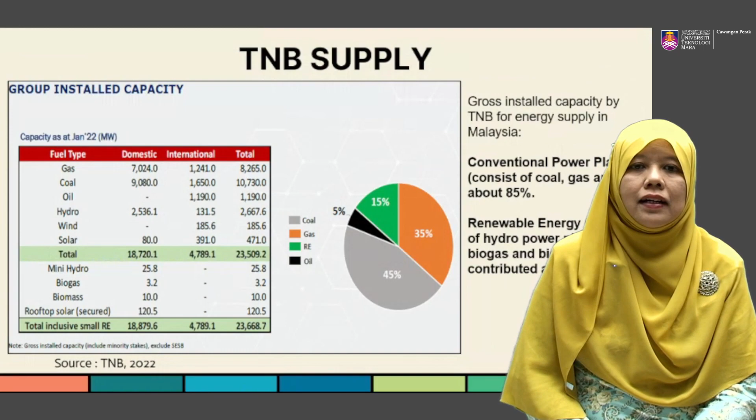There are two types of conventional plants in Malaysia. The first is the coal power plant, which has two types: non-ultra supercritical (non-USC), the normal coal power plant, and ultra supercritical coal plant, which has improved efficiency. The second type is the gas power plant.

This includes open cycle gas turbines and combined cycle gas turbines. For the gas power plant, in case of a shortage of natural gas, this plant can also run on distillate fuel oil.

Renewable energy includes hydro and solar. There are two types of hydro power plants in Malaysia: hydro power plant with capacity more than 10 megawatts, and mini hydro plant with capacity less than 10 megawatts. For solar, there are two types: ground-mounted solar farms, called large scale solar photovoltaic farms (LSS), and floating solar power, which is only a case study in Kelantan.

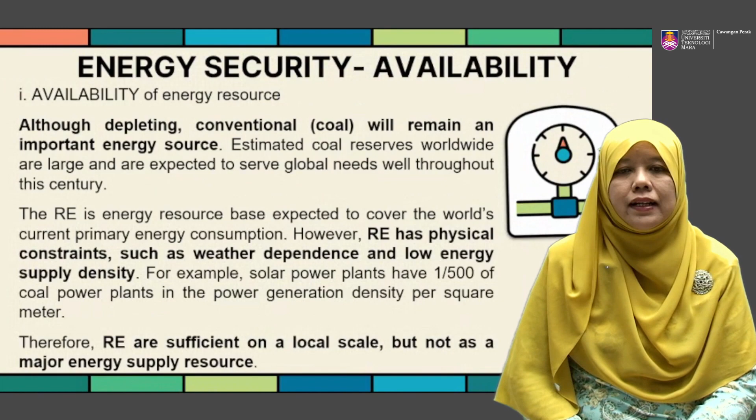The third factor of energy security is environmental acceptability. The main barrier for coal is environmental sustainability in terms of greenhouse gas production, which has generated enormous public interest. Technology development in carbon capture and storage is a potential technology to reduce carbon dioxide emissions.

The challenges for huge renewable energy projects like massive hydro and large-scale solar farms are land acquisition, environmental degradation, and deforestation. The development of a huge dam or solar farm will impact society and have other environmental repercussions.

The last issue of energy security is affordability, specifically investment cost affordability. Among energy resources, coal prices are relatively stable and require the least investment cost. However, to achieve an economic and environmental balance, coal is subject to additional costs from applying technology to reduce carbon dioxide emissions.

Cost competitiveness is a major challenge for renewable energy as it costs more than coal in infrastructure construction and energy generation costs. Technology advancement is considered an effective way to reduce the cost of renewable energy development and storage.

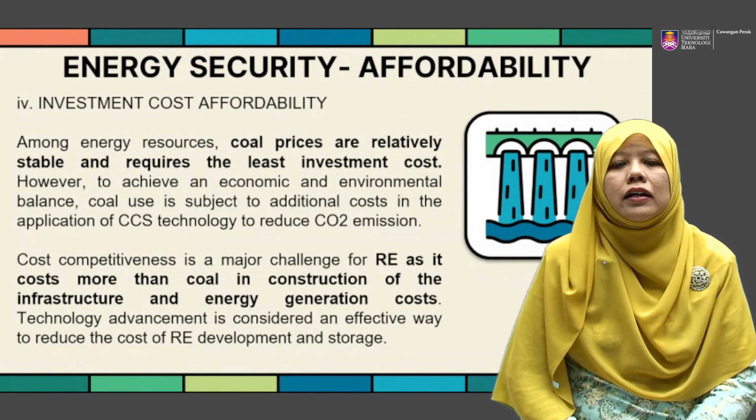These are the challenges in terms of sustainability, innovation and technology, quantity supply, demand requirement, affordability, and sources. For sustainability: environmental and social impact of power plant development, environmental aspects related to the size of the plant, the footprint, area required, the impact to the environment, and greenhouse gas reduction.

For innovation and technology, advancement is needed, such as battery energy storage systems for renewable energy, and matched energy technology such as ultra supercritical coal plants is required. For quantity supply, power generation density and the ability to generate electricity to meet energy demand is required.

For affordability: investment cost, and reasonable, affordable tariffs to customers. For resources: abundance of resources, whether limited, locally available or imported, transportation constraints, and weather dependency. So these are the challenges.

As a conclusion, diversification of fuel sources to generate electricity is essential to ensure reliability and sustainability of energy supply to the national grid in Malaysia. This seeks the balance of energy supply between conventional and renewable energy, which is a long way to achieve in sustainability of energy supply.

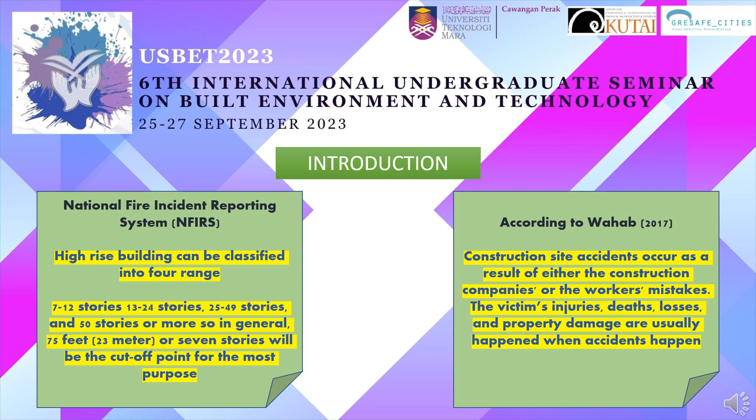According to Wahab 2017, construction site accidents occur as a result of either the construction companies' or the workers' mistakes. The victims' injuries, death, losses, and property damage usually happen when accidents occur. Due to this, construction projects may have a financial and time impact, which might lead to project cost overruns and delays.

High accident rates in construction are nothing new, but they are not something to be taken lightly. When an accident occurs, it affects not only the injured person, but also the morale of other workers. In addition, it costs money and slows down construction progress. It has been apparent in recent decades that the building industry needs to be more aware of safety, because work-related injuries, workers' compensation, insurance premiums, injury-related indirect costs, and litigation are all quite expensive.

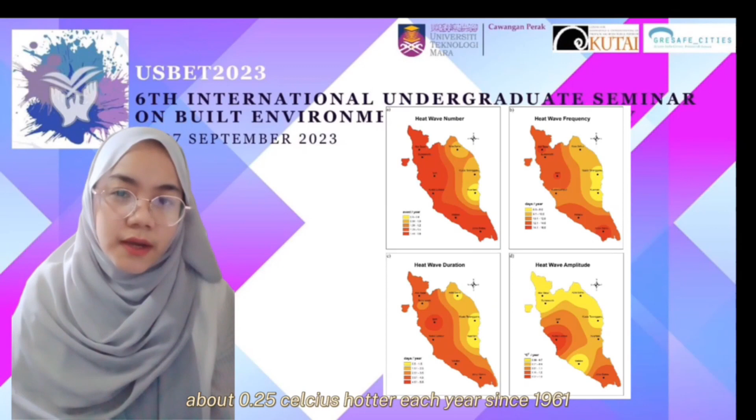Let's start with the weather check. Over the years, Malaysia has been getting warmer, about 0.25 Celsius hotter each year since 1961, and it's not just the heat. Rainfall patterns have gone a bit haywire, with extreme events like heavy rains and heat waves becoming part of our life.

So what's the big deal? Well, climate change isn't just about messing up the outdoor plants, it's causing floods, landslides, and rising sea levels. And guess what? Our buildings are not immune to all this drama.

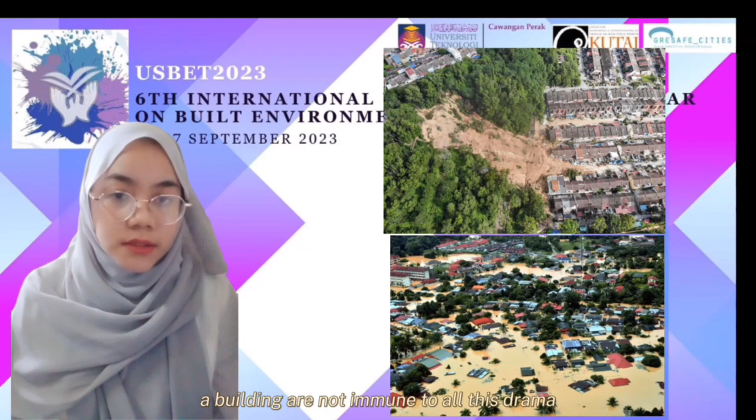Here's the scoop. Climate change brings on a bunch of new challenges for building upkeep. Think leaky roofs from heavy rain and structures taking a beating during storms. It's like our buildings are facing extreme weather tantrums.

Now let's talk about money. Keeping buildings in good shape isn't free, actually it can eat up a big chunk of the budget. Imagine maintenance costs shooting up like a thermometer on a hot day.

Time for some real-world action. Our research zoomed in on the mosques in Seri Iskandar: Masjid Bandar University and Masjid As-Siddiq. These places serve as our detective to understand how climate change impacts maintenance.

To sum it up, this research shouts out a loud and clear message: climate change and building maintenance are like buddies. What happens to the weather affects how we care for our structures. And guess what? It calls for action.

And that's a wrap. Remember that together we can shape our future, where our buildings stand strong against the challenges of climate change. Thank you all for joining me on this journey through the impact of climate change on building maintenance. Your attention and interest truly meant a lot. Thank you.

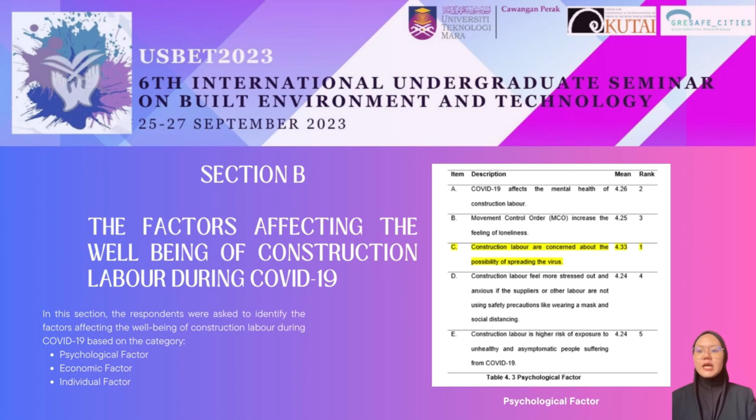The table showed the psychological factor affecting the well-being of construction labour during COVID-19. Construction labour's concern about the possibility of spreading the virus has been found as the main psychological factor for construction labour. Next, economic factor.

The most highly rated economic factor was SOP limiting the number of labourers on a construction site. Last but not least, individual factor: the most highly rated was the spread of the virus caused by the lack of social distancing between construction labour.

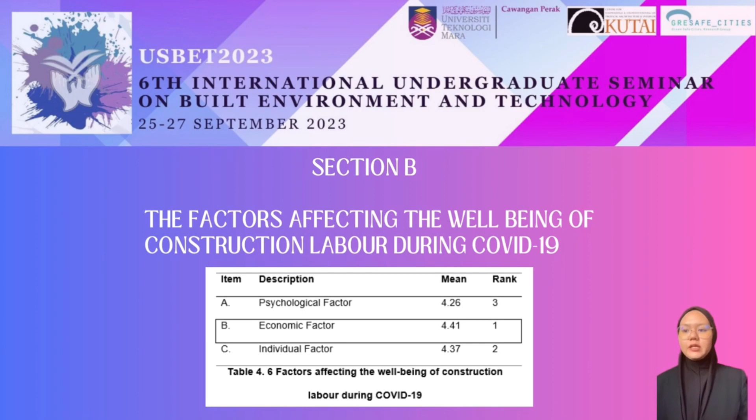Based on the analysis of factors affecting the well-being of construction labour during COVID-19, the mean score for each category was discovered. The most affected category was economic factor, followed by individual factor, then psychological factor.

In conclusion, the study showed COVID-19's impact on construction labour well-being, encouraging industry awareness and proactive measures. Understanding the pandemic's effects on health, social protection, and clear protocols and safety are important for secure work amid COVID-19. That's all from me, thank you.

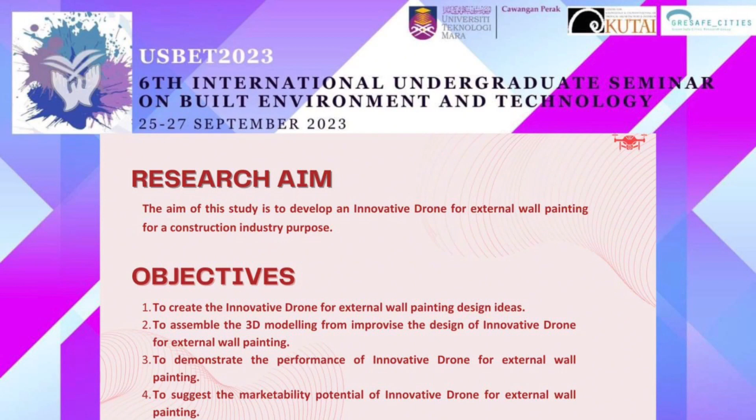There are 4 objectives that need to be achieved. The first is to create the innovative drone for external wall painting design ideas. Next, to assemble the 3D modeling from improvising the design of the innovative drone. Third, to demonstrate the performance of the innovative drone, and the last is to suggest the marketability potential of the innovative drone for external wall painting.

The literature review, collected from various databases, consists of first, dependency on workers; next, issues with chemical wall paint exposure to painters which relate to health issues; and the last one, issues with the safety of painters at high-rise buildings.

Performance demonstration for the drone innovation for external wall painting: the drone controller received the total area of the external wall from the computer system in a LiDAR 3D view. The barrier elements such as windows and cladding also appeared in the LiDAR 3D view.

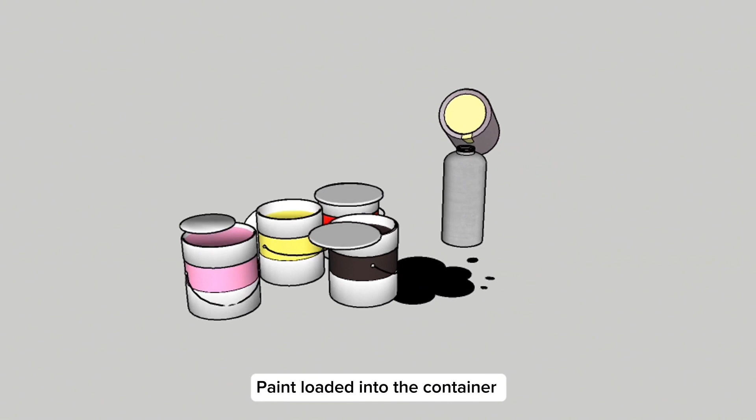Desired paint or colors were loaded into the paint container. The drone was set up to start the operational process and the green light appeared. The operator will create a flight plan by finding the drone's ideal flight route to guarantee that the entire wall surface is covered. The drone was launched from a secure place.

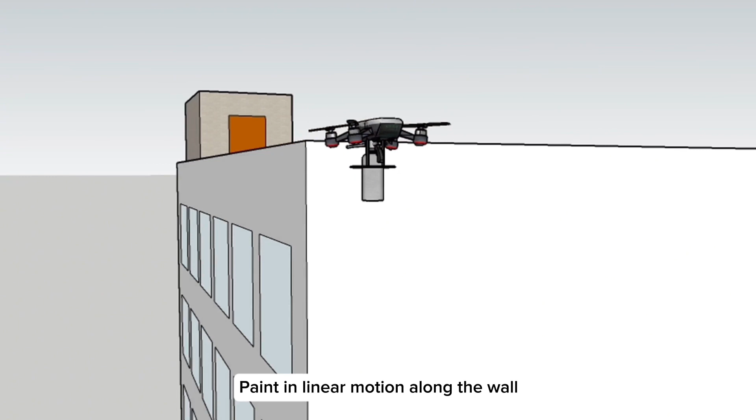The wall was painted using the built-in spray system to paint the wall surface while controlling the drone to fly along the planned route. The painting operation moved in a linear motion along the wall. The drone operator continually kept an eye on the drone's location, the availability of paint, and the overall painting quality.

Surface of the paint was checked for any skip area or flaws once the wall was painted completely. The drone was landed by avoiding any hazards and safely guided back to the landing area.

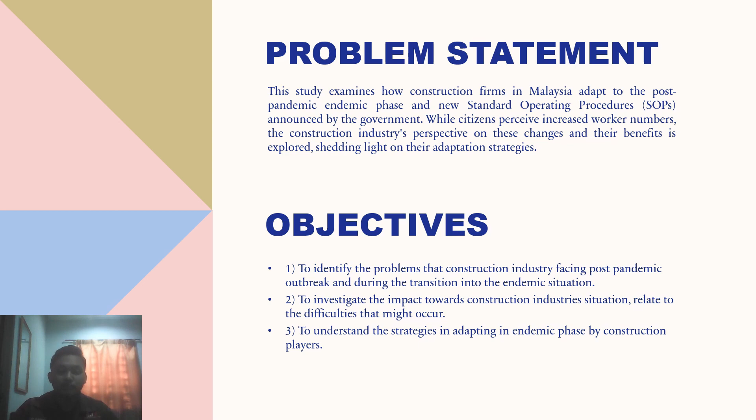For the literature review, the researcher touches on meanings in construction industry, contractor types in Malaysia, the history of COVID-19 in Malaysia, the positive and negative treatments of COVID-19 to the world, and how it affects the construction industry.

The researcher used methods where the first phase is qualitative and the second phase is quantitative. In the first phase, the researcher conducted interview sessions with construction companies from G1 to G7 to understand the actions and behavior of the companies towards the endemic.

For the second phase, the researcher used a quantitative method, which can be divided into three sections: section A, B, and C.

For the data findings, section A is about company background, with 21 respondents. This questionnaire includes gender, age, and working position, mostly about the company. From the findings, we could see that mostly men work in this industry.

Section B is about issues arising. The survey asked each company to elaborate on their problems after the pandemic, such as critical priorities, case scenarios, and current situations that happened.

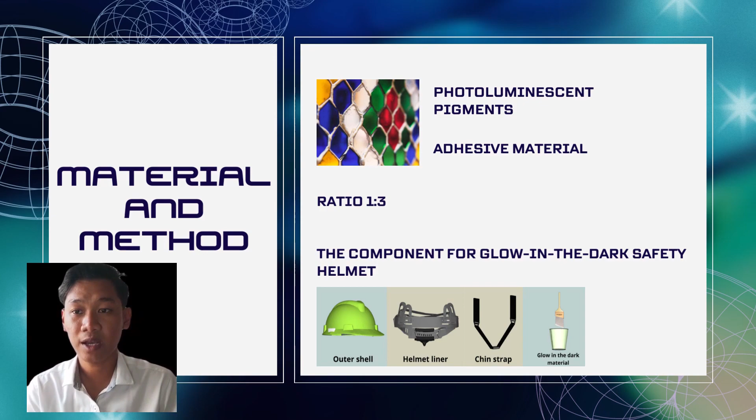The manufacturer mixes this pigment into the helmet-based material, which ensures consistent distribution. The material is also designed to absorb and store energy from the light source, effectively charging the helmet for later use.

Let's go to the limitations of the study. The first one is the conceptual study. There is no data collection or lab testing involved, due to time limitations.

The second limitation is the limited testing conditions. If the helmet is only evaluated in a certain lighting scenario, such as complete darkness or low light, the result might not be generalizable. The last one is the limited population, as the result may not apply to other groups who may use the helmet, since the studies solely included members of one particular group, such as construction workers.

The advantages of the glow-in-the-dark safety helmet: first, it can enhance worker visibility in low light or dark conditions. Second, it ensures workers remain easily noticeable, thereby enhancing overall workplace safety. Third, it plays a vital role in enhancing worker morale. Lastly, it can offer significant cost savings by preventing workplace injuries, particularly head injuries.

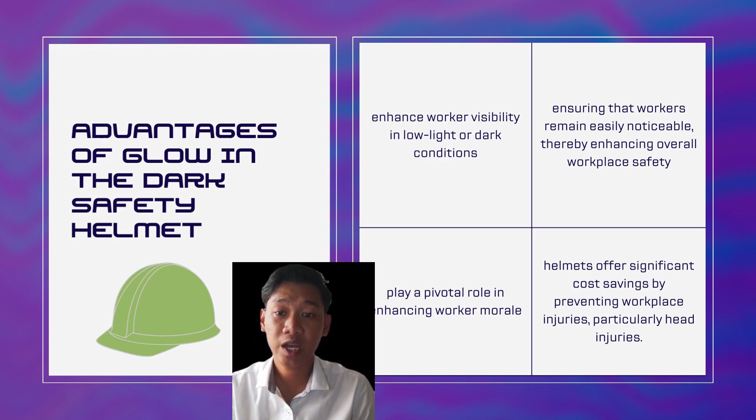For the conclusion and recommendations: the development of the glow-in-the-dark safety helmet represents a significant breakthrough in the field of safety gear technology. This innovation greatly reduces the risk of incidents and enhances overall safety for workers. Lastly, we encourage manufacturers to re-evaluate their designs and prioritize visibility and enhanced safety measures in their products.

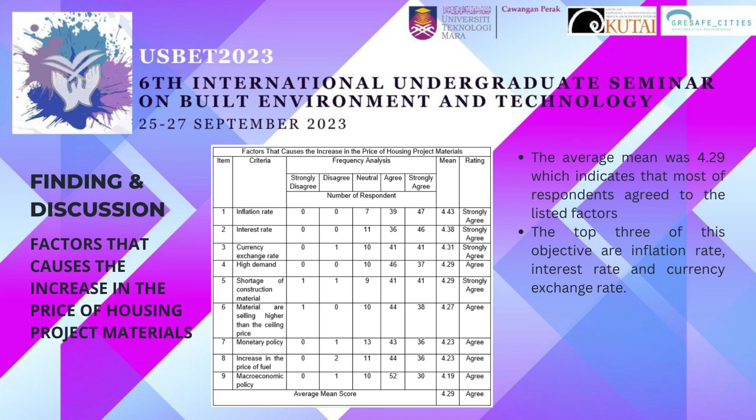The second objective is factors that cause the increase in the price of housing project materials. The top 3 of these factors are inflation rate, interest rate, and currency exchange rate.

The third objective is ways to reduce problems due to price fluctuation of housing project materials. The top 3 of these are better contract procedure, good human resource management, and improved contractor financial utilization.

In conclusion, the study undertaken has shed light on the significant impact of material price fluctuation on housing projects. The study has revealed that material price fluctuation can disrupt project budgets, leading to cost overruns and financial instability. This, in turn, can lead to delays in project timelines, affecting overall project schedules and potentially causing missed opportunities in the real estate market. The study has underscored the importance of risk management strategies in mitigating the adverse effects of material price fluctuations.

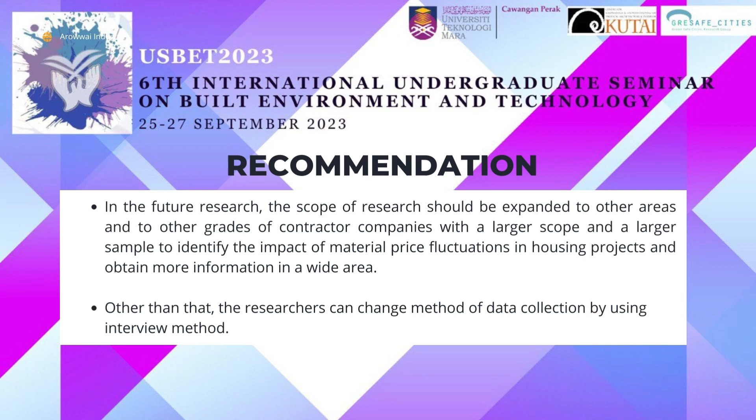In future research, the scope of research should be expanded to other areas and to other grades of contractor companies, with a larger scope and a larger sample, to identify the impact of material price fluctuation on housing projects and obtain more information in a wide area. Other than that, researchers can change the method of data collection by using the interview method.

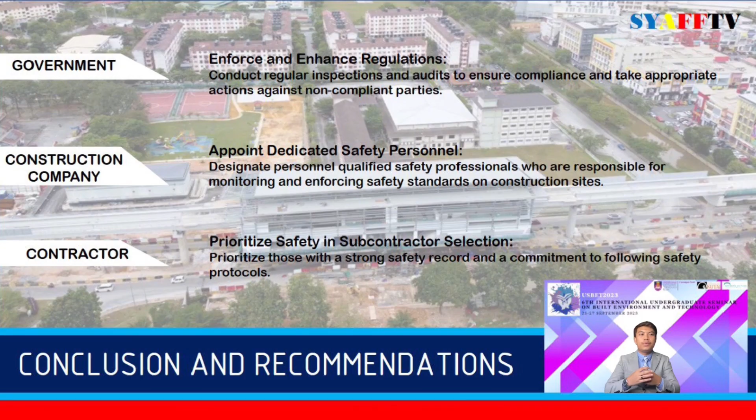For introduction, the goal of material management is to ensure that the materials are available at their point of use when needed. If the materials are not managed properly, then it affects the cost of the construction, and the time and effort invested in the construction site is wasted.

There are many problems affecting the construction project. Materials management in high-rise building construction involves the effective coordination and control of construction material throughout the project life cycle.

Material management is an important function for boosting productivity and efficiency in construction projects. The term refers to a combination of processes responsible for the searching, purchasing, moving, storing and controlling of materials in an effective and cost-effective manner.

It also aims to gain economy in purchasing, satisfy demand during periods of replenishment, carry reserve stock to avoid stock out, stabilize fluctuation in consumption, and provide a reasonable level of client service.

For research aim and objective, the aim of this research project is to identify how material management is to be managed in high-rise building, and the challenges faced by the contractor to organize the material.

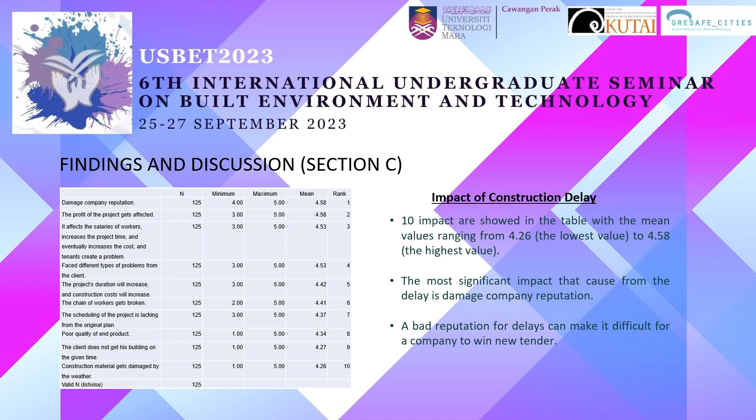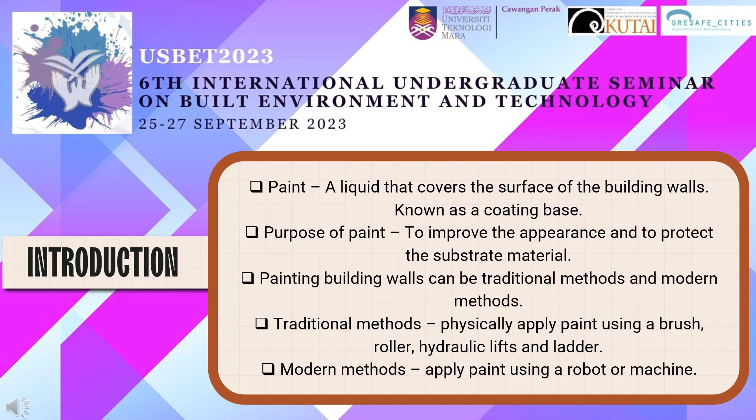The aim of this study is to develop an automatic spraying robot for wall painting that can perform the task of painting building walls using the spray technique.

There are 4 objectives that need to be achieved. First, to create the design idea for an automatic spraying robot for wall painting. Second, to assemble and improvise the design of an automatic spraying robot for wall painting productivity. Third, to demonstrate the performance of an automatic spraying robot for wall painting productivity.

And last but not least, to demonstrate entrepreneurial skill in proposing an automatic spraying robot for wall painting productivity which can be marketable.

The literature review collected from various databases consists of, first, history of paint; second, composition of paint; and last but not least, types of paint.

Moving on to the data collection method. The data was collected through test study and design thinking. Then all the data was analyzed to generate the 3D modeling.

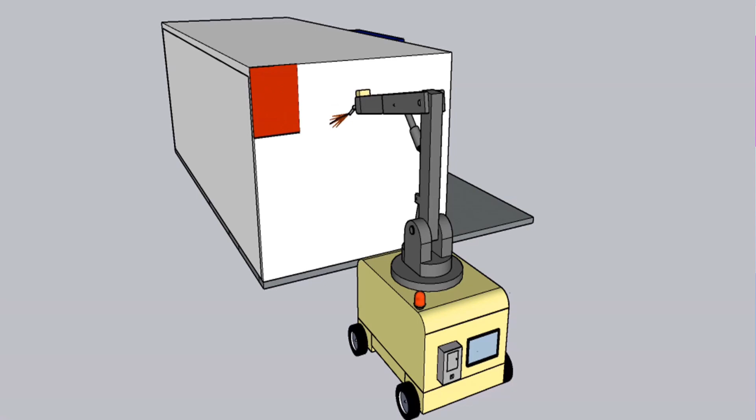After setting up the robot, press the start button on the monitor and the robot will begin painting the building walls vertically. The robot moves its arm along a predetermined course, spraying paint at a fixed distance. Lastly, the robot moves onto the next portion of the wall until the whole building wall has been painted. After finishing painting the building walls, the robot will return to its starting point.

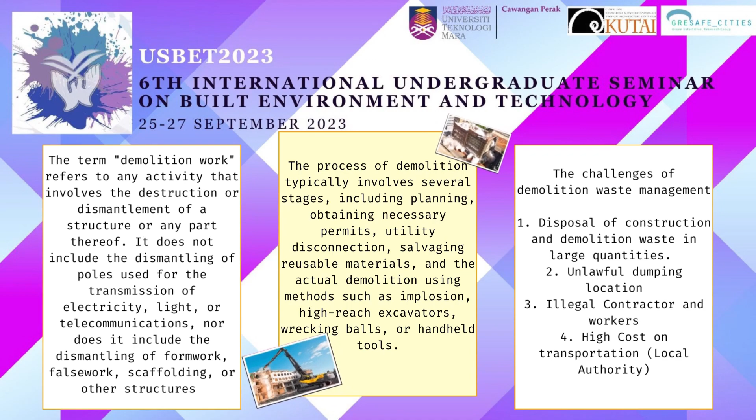The challenges of demolition waste management: first, disposal of construction and demolition waste in large quantities; second, unlawful dumping location; third, illegal contractors and workers; and the last one, high cost of transportation for local authority.

Next, the objective of this research is to identify the challenges raised in managing demolition waste in local authorities in Selangor. The problem statement is that a significant amount of construction material is wasted due to improper handling at construction sites.

The method used is a quantitative method. This study covers demolition waste management practice in Selangor, with questionnaires distributed to the building control, engineering, and waste departments in local authorities.

From the analyzed data collected from 50 respondents on each related scale question, all of the challenges in implementing demolition waste management rated as high.

This is based on respondents' answers to the questionnaires, but the highest mean was found at number 2, which is unlawful dumping, with a statistical mean of 4.8.

Some recommendations for improving local government management of construction and demolition waste can be obtained, namely, first, using more advanced and efficient construction technologies to reduce construction and demolition waste, such as the use of Industrialized Building System (IBS) to reduce waste.

Second, increasing the amount of construction and demolition waste that is reduced, recycled, and reused.

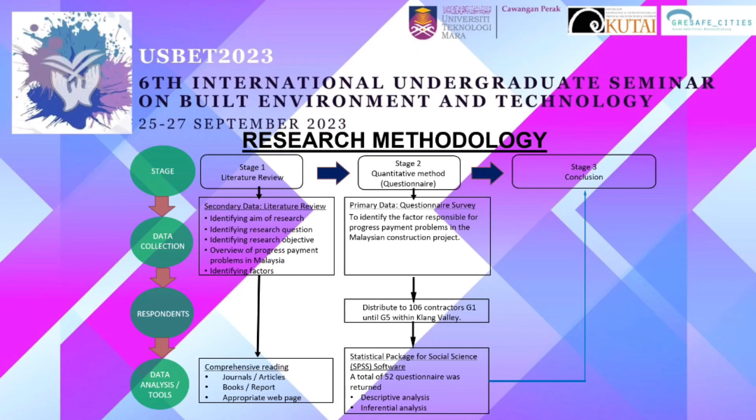The top 3 main factors contributing to progress payment problems are delay in payment certification with a mean score of 4.23, dispute over the amount valuation of works with a mean score of 4.23, and lack of knowledge of the standard construction contract with a mean score of 4.21.

Delay in payment certification may be due to the ineffective payment procedure by the client. This is supported by Masrom et al. 2021, who stated that if the certification was submitted late by the client, it is possible that the contractor will not receive payment.

In conclusion, the top 5 factors have been successfully identified, which are delay in payment certification, dispute over the amount of valuation of works, lack of knowledge of the standard construction contract, delay in interim payment evaluation and certification, and slow processing and delay in the finalization of the variation order. It is crucial to identify these factors in solving progress payment problems among contractors.

For future research, a further study could be expanded to include the construction industry's manufacturers and suppliers. By involving both the manufacturing and supply sectors of the construction industry, the outcome will be more comprehensive and the study will be much simpler for future researchers to utilize.

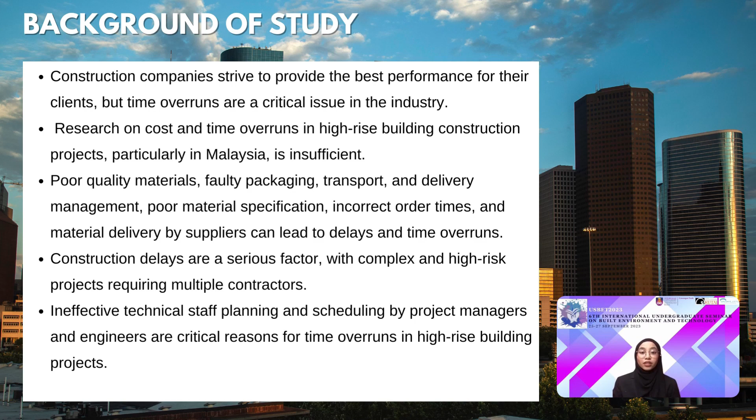In this study, three problem statements were identified: quality of materials that does not meet the standard or contains defects; high-rise building projects are exposed to construction delay due to the complicated process of construction.

High-risk projects will require several contractors to complete the works, and ineffective technical staff planning and scheduling by project managers and professional engineers are the most critical reasons that lead to time overruns on high-rise building projects.

Every statement above was supported by previous researchers: Statement 1 supported by Rahman et al. 2017, Statement 2 supported by Eric, Aaron and Edmund 2019, and the last statement supported by Hasinda et al. 2018.

This study was conducted to recommend strategies to contractors to reduce the delay problems that impact high-rise building projects towards time overrun in Selangor, Malaysia.

Next, I will explain about the literature review in this study. What is a project delay? Based on Trauner 2009, project delay is an event occurring at a later time than anticipated, or to be completed later than planned, or fails to take appropriate steps, or occurs after the contract's agreed upon date.

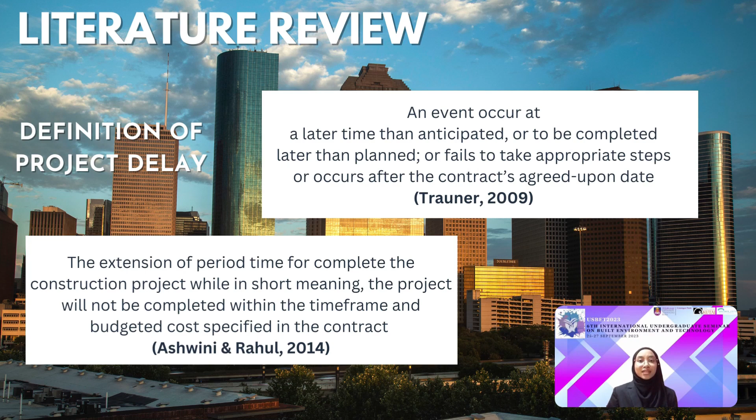Meanwhile, based on Ashwini and Rahul 2014, project delay can be defined as the extension of period time to complete the construction project, while in short meaning the project will not be completed within the time frame and budgeted costs specified in the contract. There are two types of delay: non-excusable delay and excusable delay.

According to Salih Al-Hadithi 2009, non-excusable delay means the contractor or its suppliers caused the delay without fault by the owner. Meanwhile, excusable delay, based on Wa'il Al-Ghabari 2007 and Salih Al-Hadithi 2009, means the owner or owner's agents are causing the compensable delay, while third parties or events outside the control of the client and the contractor cause excusable delay.

Next, factors that are frequently mentioned by previous researchers are delays in approval design and documentation, low productivity of labor, poor management and supervision at site by contractor, and less experience of contractor. Meanwhile, the rest of the factors are not usually stated by previous researchers.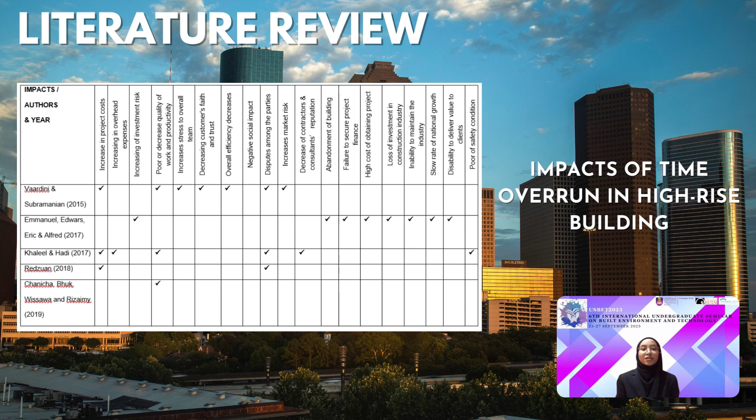Next, this table is regarding the impacts of time overrun in high-rise buildings by previous researchers. The most impacts mentioned by previous researchers are increase in project costs, decreased quality of work and productivity, and disputes among the parties. Furthermore, the rest of the impacts are not often stated by previous researchers.

The study utilized primary and secondary data collection methods. Primary data was collected from contractor companies in grade 7 in Selangor, Malaysia, using an online questionnaire survey with the Likert scale. Secondary data was obtained from previous researchers and journal articles focusing on the years 2015 to 2022, as they are relevant to the research topic.

The population of the study is 3,244 contractor companies of grade G7 in Selangor. For the number of sample size, it had been obtained from the Krejcie and Morgan table 1970, and to get the sample size, random sampling method had been used. The sample size is 341 contractor companies in Selangor.

The sampling frame consists of project manager, senior project manager, and professional engineer. However, the written questionnaires were obtained from only 74 of 341 respondents due to the limitation of time and cooperation from respondents. The data analysis technique used was Statistical Package for the Social Science version 28.

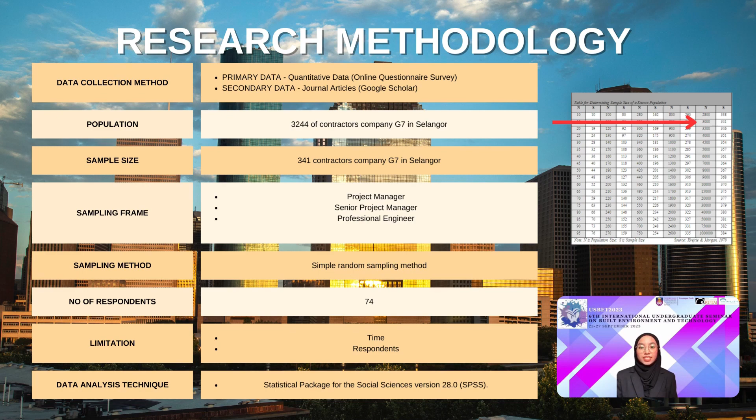The study analyzed and found that the strategy strongly agreed upon by respondents is effective planning and programming. This finding can be supported by Pankaj 2016, because this author stated that effective planning must be done and carried out to prevent the surplus or lack of materials and the variation order during the construction process.

Furthermore, Azri, Suhania and Azrina 2018 opined that implementing proper project planning and scheduling is necessary to obtain efficient time management. Additionally, Hasinda, Zian, Muhammad and Fikri 2018 mentioned that they must have effective planning and programming if they want to complete the project on time.

To sum up, the most effective strategy to reduce time overrun is effective planning and scheduling by the contractor.

Next, the contractor should be aware because other parties, especially the subcontractor, may want to take advantage of them. The contractors must hire a good subcontractor to ensure the subcontractor does their job.

My recommendation in this study is that future researchers can do research regarding time overrun in high-rise building projects, but focus only in one country, in Selangor, or the future researcher can do research regarding time overrun for high-rise building projects, but focus on residential buildings only.

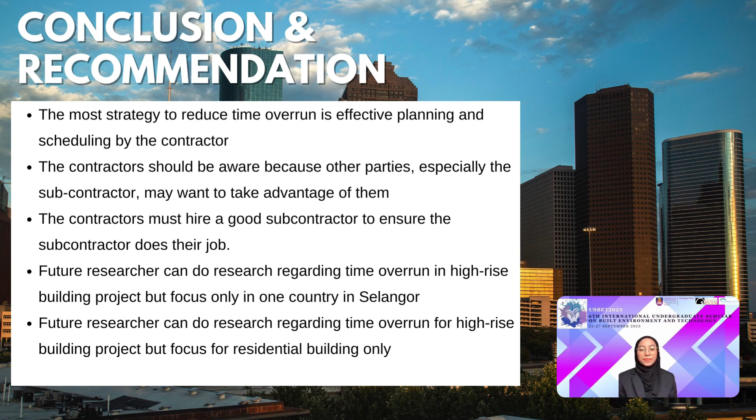In Malaysia, the construction industry is the most profitable sector to the national economy. Despite the rapid development, the problem of environmental pollution due to unplanned construction has become a major issue. The construction of urbanization that is generally based on various types of materials has caused many negative impacts on the environment. This research aims to identify the effect of the usage of construction materials towards environmental degradation and to suggest the best strategies to overcome the problems.

Among the effects from the usage of construction materials on environmental degradation highlighted in this research are health problems, environmental pollution, air pollution and increased heat, and problems in construction waste disposal.

The type of data collection used for this research is the quantitative method. The data was collected from a questionnaire survey and the respondents are architects and engineers in Pulau Pinang that work at firms registered with the Board of Architects Malaysia and the Board of Engineers. Based on Raosoft, the sample size for the population is 137. The questionnaire was distributed through Google Form and received 45 responses. The analysis was done using SPSS version 26.

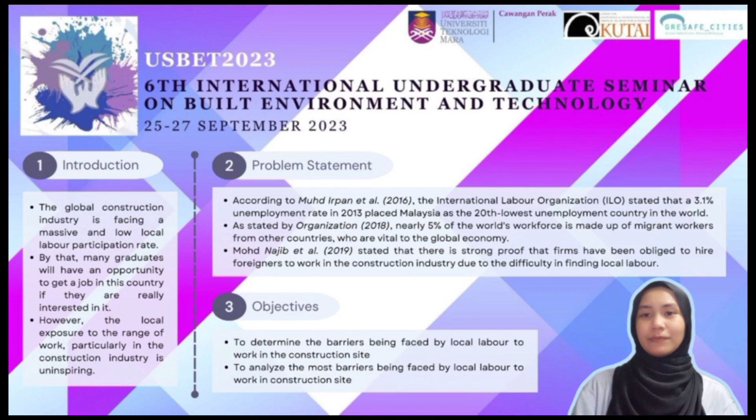Next, we continue with the literature review based on several related journals that have been found. The definition of labor can be referred to the labor force working in the construction sector, and labor can be categorized in three levels: general labor or unskilled labor, semi-skilled labor, and skilled labor.

Based on the articles and journals that have been read, there are 6 barriers for local labor to work in construction site that can be found, some of which are construction 3D syndrome and negative perception towards the construction industry.

We continue with number 5, the methodology. The study applied a qualitative method consisting of interview sessions with 5 selected personnel who are experts in the construction industry. The interview questions are structured into part A, demographic, and part B, the barriers for local labor to work in the construction site.

Those are the details of the 5 selected respondents who came from public and private sectors. As for the results and discussion, it was analysed that the most common barriers for local labor to work in construction site, based on the opinion of the 5 selected respondents, are low salary rates, work that is not commensurate with the payment, and accommodation rarely being provided by employers.

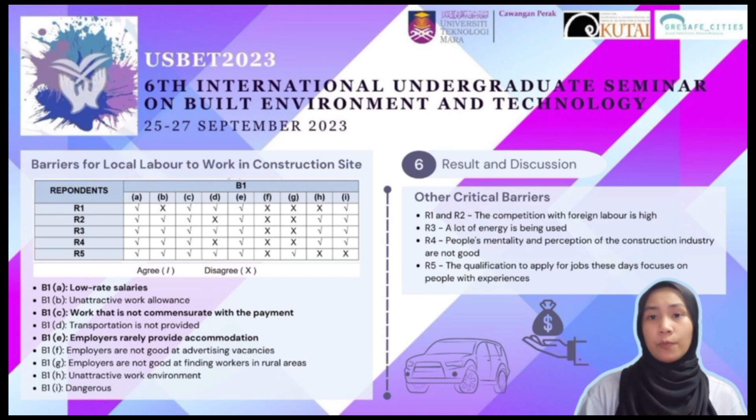There are also some other critical barriers that the respondents think might affect the low participation rate for local labor to work in construction sites.

In a nutshell, there are lots of barriers for local labor to work in the construction site, but the top 3 chosen ones are stated there. To improve knowledge about barriers for local labor to work in construction sites, employers, labor, and fresh graduates need to review the stories of those who have previously been involved in the construction industry.

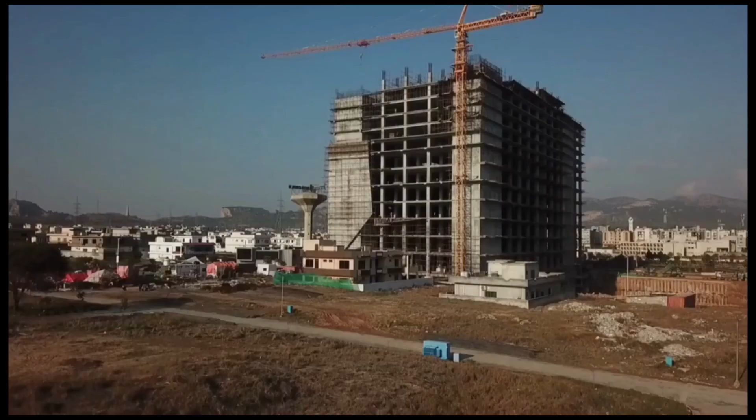In the theatre of construction project management, the spotlight may shine on the finished stage, but the real magic unfolds behind the scenes, where critical success factors, CSFs, take center stage. One notable example of a successful construction project attributed to excellent construction project management is the Burj Khalifa in Dubai. Just imagine, without good and effective construction project management, how could it have been constructed and currently hold the title of the tallest building in the world?

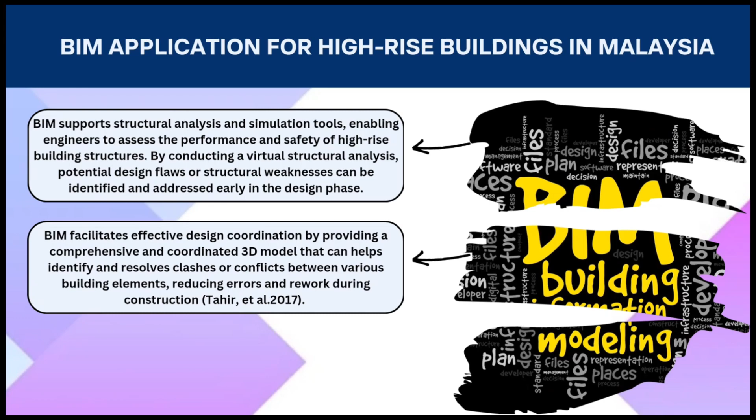Tahir et al. mentioned that BIM can help identify and resolve clashes, also reducing error and rework during construction. By conducting an analysis, design flaws can be identified and addressed early in the design phase.

For methodology, this research has been done in Kuala Lumpur since it is a city with a significant number of high-rise buildings. The method chosen for this research is quantitative, and 200 questionnaires were distributed, but only 148 respondents were valid.

Now let's take a look at data analysis and findings. Respondents were asked about the type of organization, as this study is only focused on consultant quantity surveyors. With a result of 87%, these findings are relevant to the research focus targeting consultants.

Then respondents were asked about their experience in using BIM. However, only 38% of respondents said yes. This result highlights the need for further exploration of the challenges in implementing BIM in Malaysia's construction industry.

Next, respondents were asked about their experience in handling high-rise building projects using BIM. Turns out only 5% of respondents have experience with BIM in high-rise building projects, and maybe there are barriers hindering its adoption. In the section on implications of application, improved communication and collaboration had the highest value of 4.46.

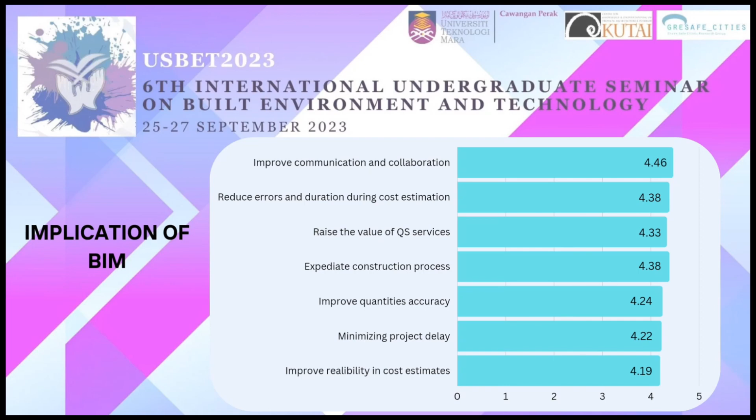This aligns with previous research by Latifi et al., which also emphasized the positive implications of BIM application.

In conclusion, the implementation of BIM significantly impacts the roles of consultants and quantity surveyors in high-rise building projects. BIM enhances communication and collaboration, empowering them to contribute to project success. As BIM evolves, the construction industry can expect improved outcomes and increased efficiency. Future research should explore technology adoption barriers and BIM implementation strategies.

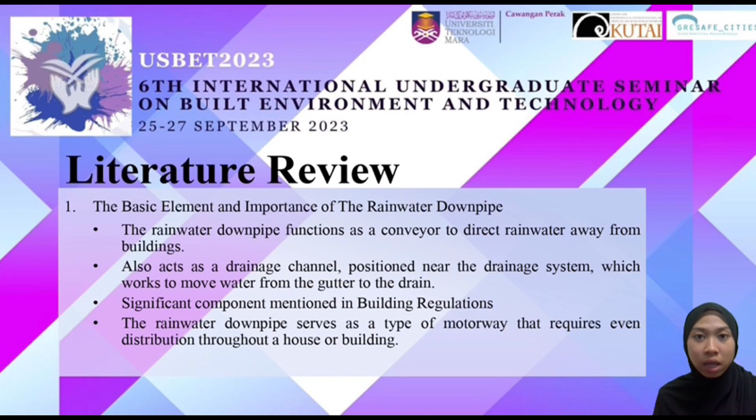Next is the issue caused by the gutter and rainwater downpipe. One problem is damage to the foundation that occurs when water sits and accumulates in the gutter after rain, causing the water to rot because it does not go anywhere, leading to rot and decay, which then leads to foundation cracks. Roofs can also rot and fall apart from the accumulation of water in the gutter. Besides, it can also cause erosion that leads to falling of the roof or crumbling.

Next is the blockage and clogging in water pipelines. Water accumulation happens when foreign matter prevents the water from flowing, resulting in blockage and clogging. Clogging is caused by substances such as leaves and other trash accumulating in pipes. This clogging may affect humans, including causing poor drainage. The piping system has also been found to be a breeding ground for Aedes habitats, which can cause and spread harmful disease.

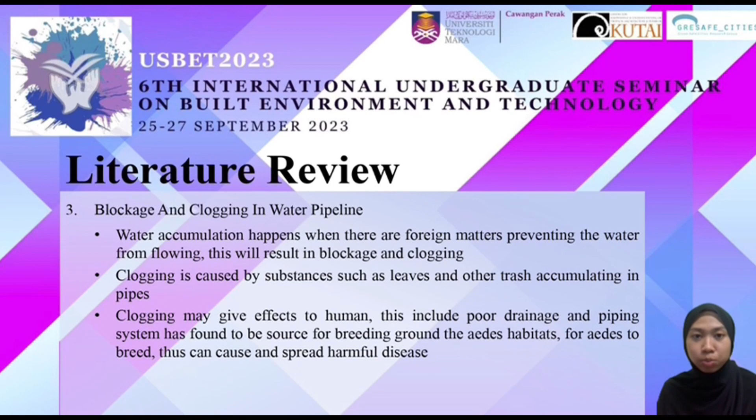For the last point of the literature review, various existing innovations. There are 3 of them that I found related to my innovation, which include the gutter helmet, gutter guard, and also the gutter cleaning robot.

For the methodology, it consists of 2 types: the research design and the research process that I have used throughout my innovation process.

This is my result and discussion, the development of innovation, which consists of the rainwater downpipe, the gutter, and also the motor system that I'm going to apply in this innovation. For the development performance, I found that my innovation is able to increase the productivity of the gutters, making them require less maintenance, and secondly, they are able to prevent issues like mold accumulation and water damage, which led to damaged landscaping and flooded basements. This is my overall innovation idea that I converted into animation.

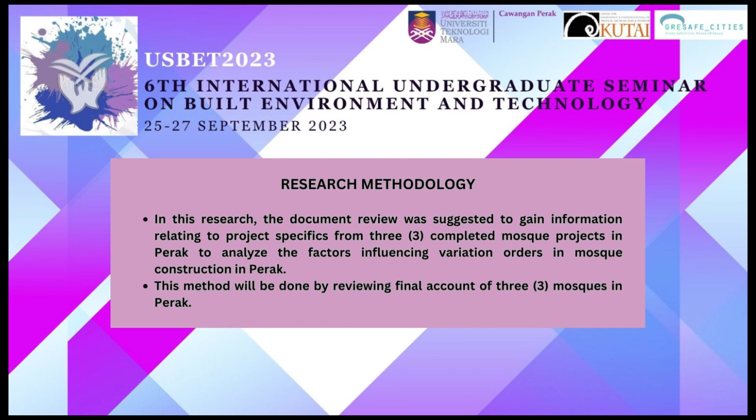For the literature review, 13 factors affecting variation orders were found. Research methodology: in this research, document review was used to gain information relating to project specifics from 3 completed mosque projects in Perak, to analyze the factors influencing variation orders. This was done by reviewing the final accounts of 3 mosques in Perak. For the findings and discussion, this table shows the frequency of factors affecting variation orders.

In conclusion, the analysis revealed that changes in scope, specification, design by consultants, schedule, and hindered decision-making process emerged as the major factors influencing variation orders.

It is recommended that future researchers enhance the study by conducting case studies in states other than Perak, utilizing survey questionnaires as an alternative data collection method, and targeting respondents from diverse backgrounds, including quantity surveyors, contractors, developers, and architects. That's all from me. Thank you.

Assalamualaikum warahmatullahi wabarakatuh. My name is Muhammad Adam bin Muhammad Nasir from Bachelor of Quantity Surveying. Today, I will present my research paper titled An Empirical Study on the Constraints of Women Working in Malaysia Construction Projects.

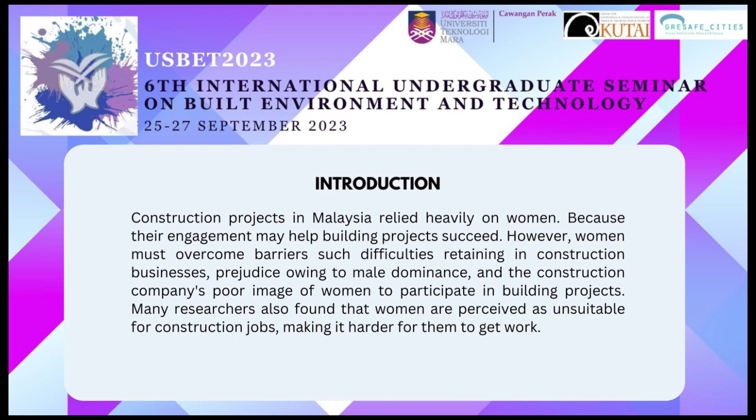Malaysian construction projects use women; their cooperation may assist in construction. Women must overcome restrictions in construction companies, male dominance, and the company's negative image of women to participate in building projects. Many studies discovered that women are considered unsuitable for construction labor, making it hard for them to get jobs. So there are 3 problem statements: difficulty for women to retain positions in construction companies, discrimination towards women due to male dominance, and the construction company's negative image of women.

This research paper aims to suggest strategies to encourage women to get involved in construction projects, along with the objective, which is to determine the constraints that women face in Malaysia's construction projects. The methodology will be a quantitative approach towards contractor companies graded G5 until G7, using a questionnaire survey and also a literature review. Along with that, there are 5 constraints for women in construction projects.

First is that construction projects and the industry are dominated by men. Construction companies are more likely to recruit men than women for the survival of their companies. Third, women are often used as objects of sexual harassment among the constraints faced by women in construction projects. Fourth, women's physical and psychological health are often challenged by bullying culture by men, such as excessive workload, and the last one is that men undervalue women in construction projects.

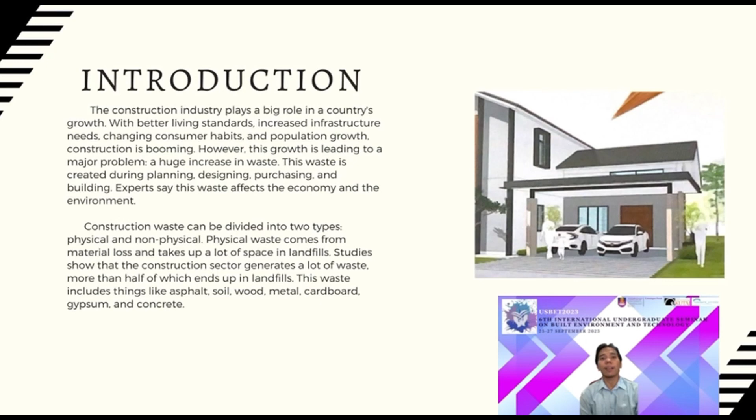Construction waste can be divided into two types: physical and non-physical. Physical waste comes from material loss and takes up a lot of space in landfills. Studies show that the construction sector generates a lot of waste, more than half of which ends up in landfill. This waste includes things like asphalt, soil, wood, metal, cardboard, gypsum, and concrete.

Okay, for the aim and objective of this study, the goal is to reduce the waste of construction debris in Alor Setar Kedah that causes problems for the company and help the ecosystem from being harmed by the waste of construction debris.

For the aims and objectives, first is to determine the success factors of construction debris management from the contractor's perspective. Next is to analyze success factors in managing construction debris. For the research questions: first, what are the success factors concerning construction debris management? Next, what are the main factors of successful construction debris management?

Okay, moving on to the literature review. Overview of the construction waste problem from contractor's perspective. Construction waste is a big problem in the global industry. For contractors, managing this waste is crucial to make projects work well, save money, and be sustainable.

Some problems include not having good incentives like money, unclear rules, and bad recycling and waste separation systems. The research suggests that policies and incentives are needed to overcome these challenges.

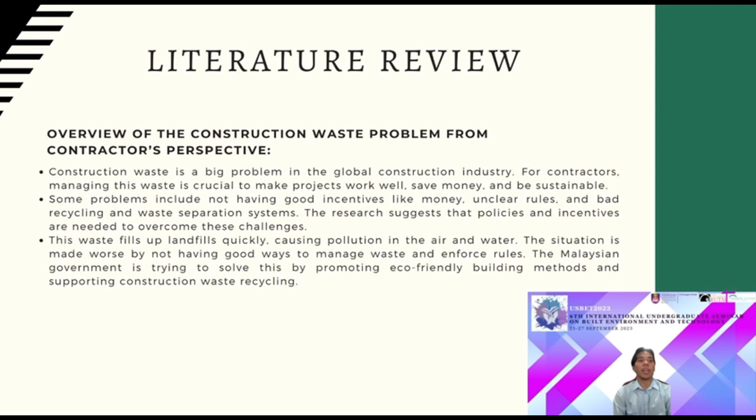This waste fills up landfills quickly, causing pollution in the air and water. This situation is made worse by not having good ways to manage waste and enforce rules. The Malaysian government is trying to solve this by promoting eco-friendly building methods and supporting construction waste recycling.

For the methodology in this study, we use only one method, which is the quantitative method. In the study, data is collected in 3 stages: literature review, questionnaire survey of Bina Darulaman Berhad employees. The following is an explanation of the data gathering method used in this investigation.

First of all, we start with the research topic. Next is the problem statement. Next is aim and objective. Next is literature review. Next is case study. Next is data collection, which is divided into 2: questionnaire, and journals and articles. Lastly is conclusion and recommendation.

Okay, for the research result or research analysis, first of all we have managing construction debris at the construction site. The analysis has been conducted and the data provided show the best ways to manage construction debris at the construction site. The data includes responses from a total of 52 or 53 respondents. Each question presents a statement and respondents were asked to rate their agreement or disagreement on a 5-point scale.

Based on the responses, a significant portion of the respondents, 38.46%, agreed that enforcement measures at the construction site are effective in managing construction debris. Next, the majority of respondents, 46.16%, agreed that having a professional site supervisor contributes positively to the management of construction debris.

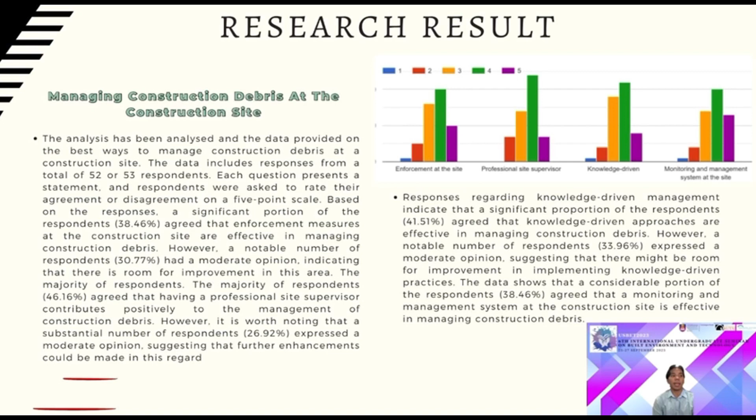Next, for the research discussion, we discuss managing construction debris at the construction site, which involves monitoring at the site and a management system. Managing construction debris at the construction site involves implementing a monitoring system and management protocol to ensure effective waste management.

The fact that 38.46% of people agreed and 25% strongly agreed on the importance of monitoring at the site and having a management system indicates a recognition of the significance of this aspect in construction debris management. A monitoring system and management protocol are essential for efficient handling of construction debris.

Next, we have 3 points. First is site monitoring. Regular monitoring of the construction site allows for the identification of potential issues and the implementation of corrective measures in a timely manner. Next is tracking and documentation. A robust management system should include mechanisms for tracking and documenting construction debris.

Lastly is training and awareness. Training and awareness require the involvement and cooperation of all personnel on the construction site. Training programs should be implemented to educate workers about waste management protocols, monitoring procedures, and the importance of their roles in maintaining a clean and sustainable work environment.

Last but not least is the conclusion. This research's objective was to determine the success factors of construction debris management from the contractor's perspective and to analyze the factors that contribute to effective management of construction debris.

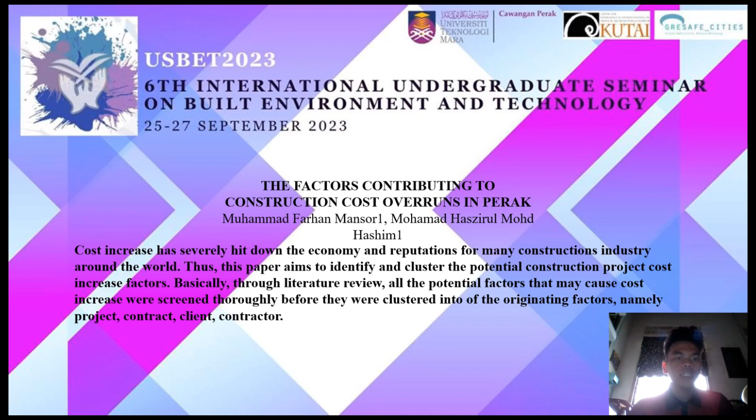The construction industry performs a fundamental role in the economic growth of any country as it stimulates the development of other industries. Worldwide, a large amount of money is spent on construction development works. In Malaysia, the construction industry is a main pillar of economic growth, and a commendable growth was observed in recent years due to an annual increase in construction works.

The methodology used for this research is literature research, to identify and evaluate the factors that increase cost in construction. My target respondents for this paper were 50 respondents who answered the survey form. For the research sampling, I found in CIDB and JKR that there are hundreds of contractors registered.

This is the analysis of the factors contributing to construction cost overrun in Perak. The analysis of responses reveals interesting insight regarding the impact of improper planning in construction on increasing costs. It indicates that a significant majority of respondents recognize the correlation between improper planning in construction and increasing costs.

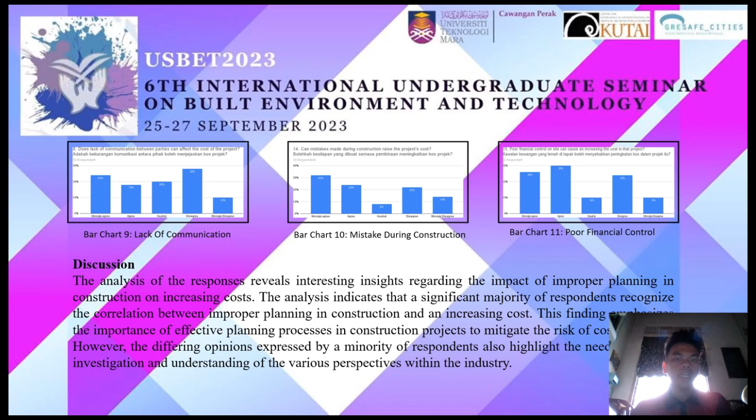In conclusion, cost increase is one of the major problems in construction projects. This study analyzed the cost increase in construction projects in Perak through a questionnaire survey, and 16 cost increase factors were identified. Several significant causative factors were unveiled, including improper planning, variation in material price, poor site management, and so on. So that's all from me. Thank you.

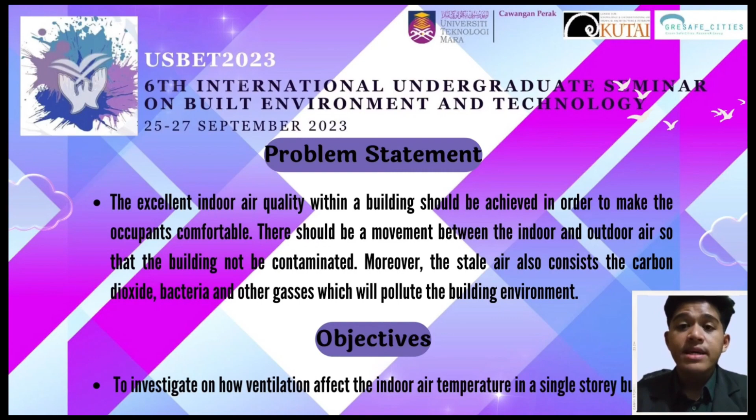Excellent indoor air quality within a building should be achieved in order to make occupants comfortable. There should be movement between indoor and outdoor air so the building is not contaminated. Moreover, stale air contains carbon dioxide, bacteria and other gases which will pollute the building environment. The objective of this research is to investigate how ventilation affects indoor air temperature in single-story buildings.

In short, ventilation is the exchange or circulation of air inside a place in order to preserve indoor air quality. It includes the flow of air into and out of a structure or specific location inside one. It is known as a need for building owners, which will provide healthy and fresh air for breathing. Without proper circulation, indoor air would be polluted. Indoor air quality is known as the quality of air inside or at the surrounding of the building, commonly related to the occupants' health and comfort.

This study employed a quantitative approach by installing an indoor air quality monitoring instrument near an opening in the kitchen at a height of about 1 meter from the floor. The IAQ instruments were set up in each case study for 2 days to monitor the change in parameters, which would be compared afterward. We only analyzed data from 7 in the morning until 7 in the evening, focusing on the relative humidity, CO2 and temperature of both case studies.

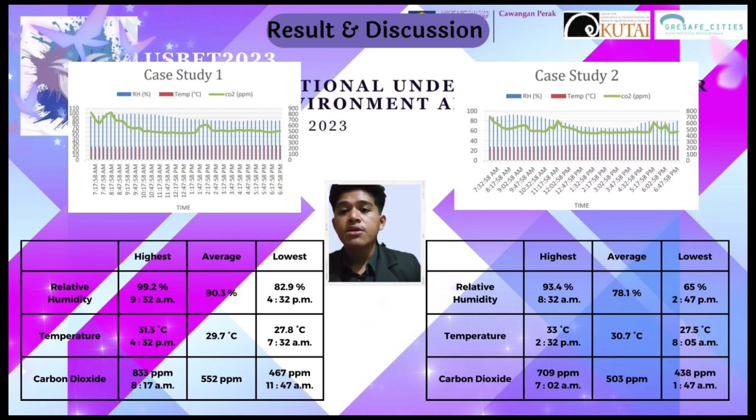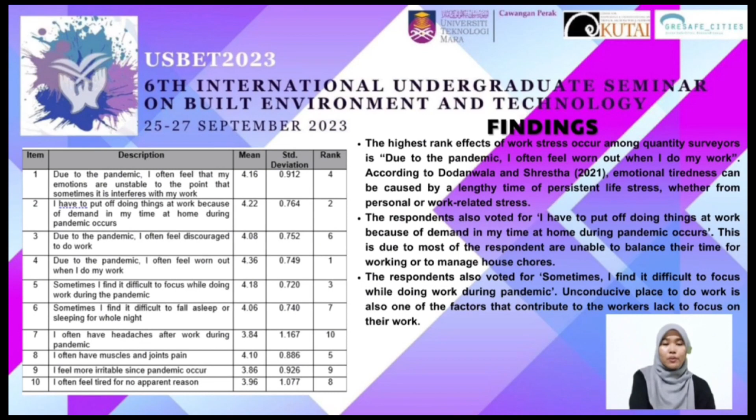In conclusion, it is hoped that the work stress occurring among quantity surveyors can be reduced. Therefore, more effort is needed to spread awareness about the effect of work stress in order to increase the work performance of quantity surveyors in Malaysia.

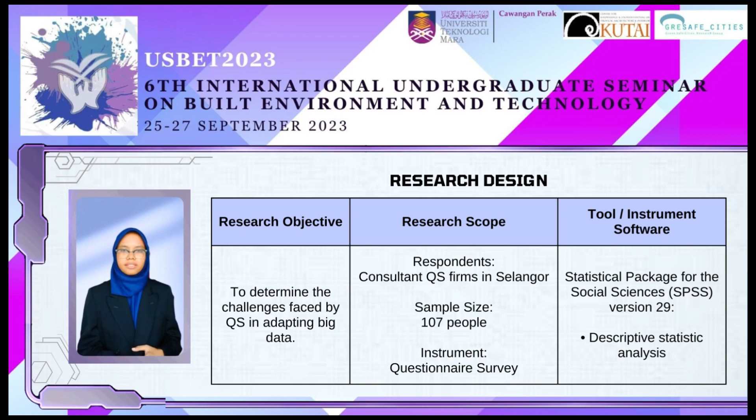After that, descriptive statistics were used to analyze the feedback from the respondents who answered the questionnaire. The statistics were in the form of frequency, percentage, and average index, using the Statistical Package for Social Science software. The data analysis produced findings and discussion.

Among the questions asked to the QS consultants regarding the challenges to adopt big data, the most agreed statement is that the data relevancy time is short and changes every time due to the market condition. These findings correlate with five past researches that indicate the data rapidly changes through time and its relevancy is very short.

As a conclusion, this study has identified and met the research objectives stated earlier. The respondents have identified several key challenges that hinder the effective utilization of big data in the QS field.

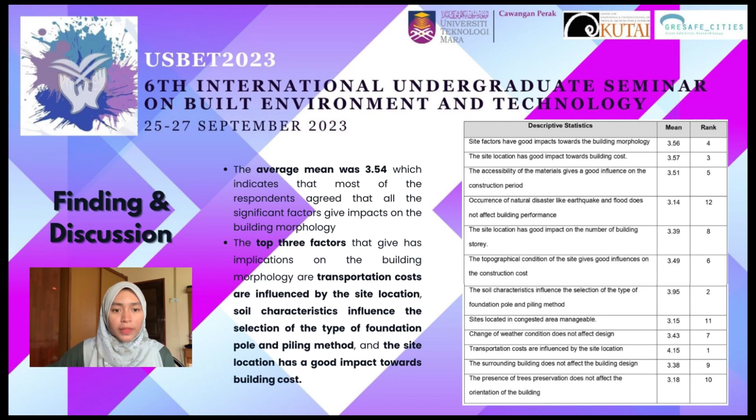This finding correlates with the study by Odusami and Onukwube 2008. As the distance grows, the cost of transporting materials to the construction site rises. The cost of transportation will also increase, and delays in completion occur due to the need to transport materials to the site, mainly if the site is located far away from suppliers, such as in rural areas.

As a conclusion, the survey findings have provided valuable insight into the site factors that impact building morphology. Based on the data analysis, it can be concluded that the highest score mean is site location, which has a great impact on transportation costs. A site located far away from resources will increase transportation costs due to the need to transport materials, labor, plant, and equipment, which will indirectly cause construction costs to increase. Site factors also help architects and designers comprehend the environment where a structure will be situated.

For the recommendation, it is suggested that future researchers broaden the scope of their research to include design teams all over Malaysia. Besides that, it is also recommended that future researchers further their studies through the contractor's perspective on how they manage site factors and challenges that occur during construction.

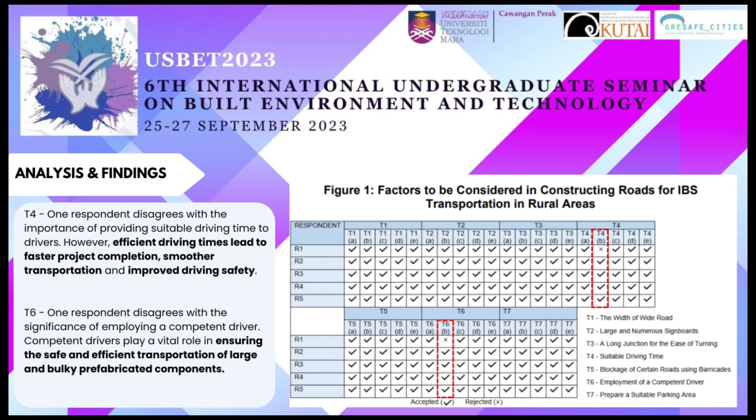In conclusion, the preliminary study and literature review analyzes any published research and provides a detailed comprehension answering the first objective. The qualitative methodology was carried out in interview sessions, answering the second objective. Lastly, the collected data is analyzed alongside supporting evidence and contributes suggestions to combat the limitations of IBS adoption in rural areas.

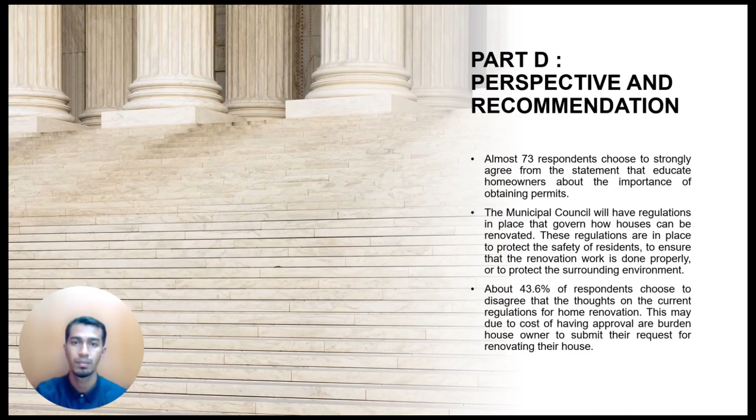For the conclusion, prior to the research, a primary study was conducted in order to provide a thorough and comprehensive literature review, with a focus on factors contributing to illegal house renovation from the perspective of the house owner. This literature study was put together utilizing information and previous research from other academics. The study successfully identified a wide range of problems that frequently occur during house renovation. All of the important and related aspects of the study scope were established prior to the survey procedure.

It started with distributing the survey questionnaire. The survey includes a range of questions and topics, and 101 respondents from various locations in the Sungai Petani area responded to the survey, which was distributed online using Google Form. That's all for me. Thank you.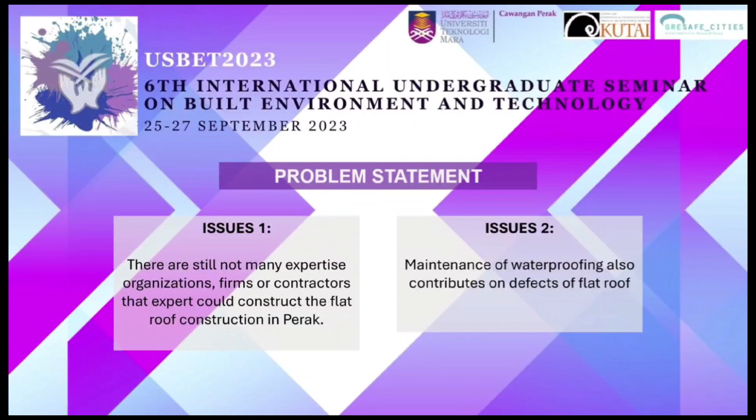Next is the objective of this research. The first objective is to identify the common causes or defects for concrete flat roofs in residential and commercial buildings. The second objective is to identify the best solution to prevent issues behind the common defects in concrete flat roofs. Okay, for the literature review.

The first one is uses of flat roof. The objective of flat roof uses was to save construction expenses.

Types of flat roofs: there are three types, which is concrete flat roof, build up roof, and metal flat roof. The common defect of concrete flat roof.

The first one is neglecting maintenance, ponding water, leaking and clogging, blistering, and lastly biological growth.

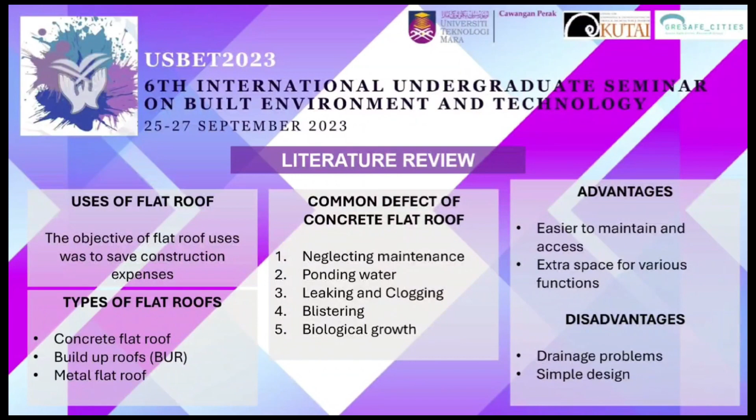These are the advantages and disadvantages of concrete flat roof. The advantages are easier to maintain and access, and extra space for various functions. The disadvantages are drainage problem and simple design.

Methodology: for the method of the research, I used a quantitative method, where a questionnaire will be distributed through a Google Form survey. Sampling and case study.

The sampling for the research will be limited to up to 100 respondents. The target location where the sample will be collected is the residential building at Seri Iskandar and Aeon Mall Station 18, Ipoh.

Result and analysis. Analysis data will be converted from frequency count to percentage. The findings for the research.

According to the study of Section C, both buildings' flat roof received the greatest mean score. This is because most building residents are quite delicate with the flat roof of their homes, which contributed to a total mean score of 3.69.

Discussion and analysis. The information from the survey questionnaire has successfully been analyzed in this chapter. The result indicates that the identification of issues using concrete flat roof among the respondents regarding concrete flat roof is low.

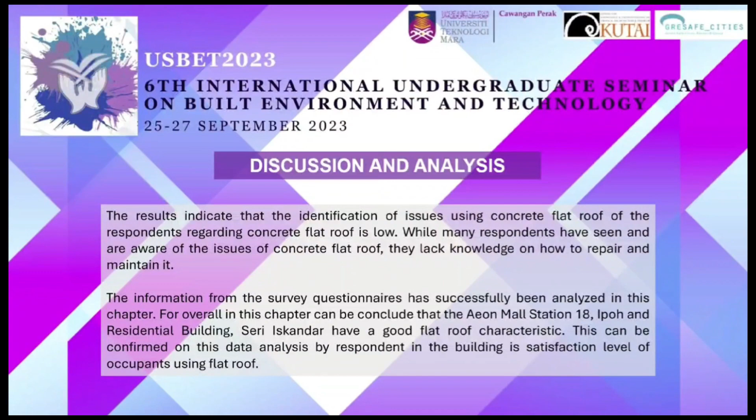Lastly is conclusion and recommendation. The objective and data of the research study is from the literature review, previous research, and questionnaire.

This research is more likely to focus on investigating issues that arise in concrete flat roof. It is recommended that focus should be on identifying and addressing common failures in flat roof, such as cracks, leaks, and ponding water, to ensure the longevity and optimal performance of a flat roof.

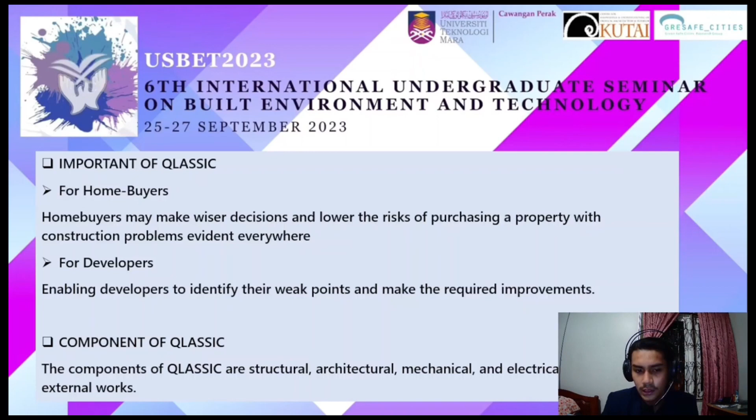The components of QLASSIC are structural, architectural, mechanical and electrical, and external work.

For awareness of QLASSIC, although QLASSIC contributes significantly to building, most individuals are unaware of its significance. These benefits include enhancing project effectiveness, raising employees' awareness of quality, improving the quality of the work, and others.

For method, an outlined questionnaire will be distributed on a scale of 1 to 5, corresponding from strongly disagree to strongly agree. The terrace house construction project in Perak Tengah will be the site. The primary data collection method is online questionnaire, and the secondary data is previous relevant articles, journals, books, and the internet.

For finding and analysis, the majority of respondents strongly agree with statement 1. They are aware that QLASSIC assessment rating can be utilized to compare the performance of internal and external projects with similar scope. Statement 2 got an equal number of respondents who agree or strongly agree, indicating that they understand QLASSIC will assess structural, architectural, mechanical and electrical, and external work.

Most respondents agree with statement 3, and some are neutral about QLASSIC assessment being carried out by the external assessor, possibly because they have not undergone a QLASSIC assessment for their own project.

As for statement 4, half of the respondents strongly agree that the outcome of the QLASSIC assessment is instrumental in determining the quality level of a project, whether it is good or poor. Respondents strongly agree with statement 5.

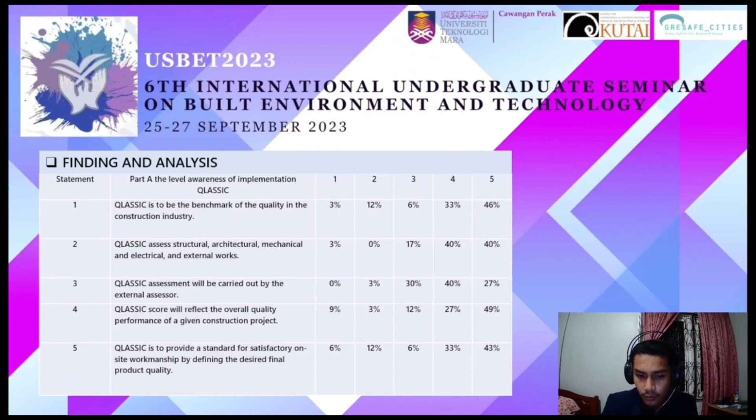If the workmanship is determined to be poor, they can identify the areas that need improvement and strive to deliver better quality of work.

In conclusion, according to the analysis of the survey data, there is a good amount of awareness regarding QLASSIC, but there is potential for improvement. To enhance the implementation of QLASSIC knowledge and awareness, employees must identify several strategies. These include providing employee training, making QLASSIC compulsory for all development projects, hosting promotional events, reducing registration fees, and enforcing QLASSIC as a primary criterion for project approval. That's all from me.

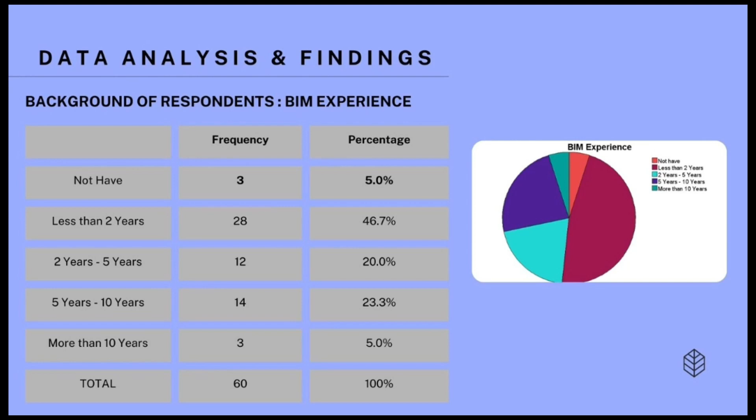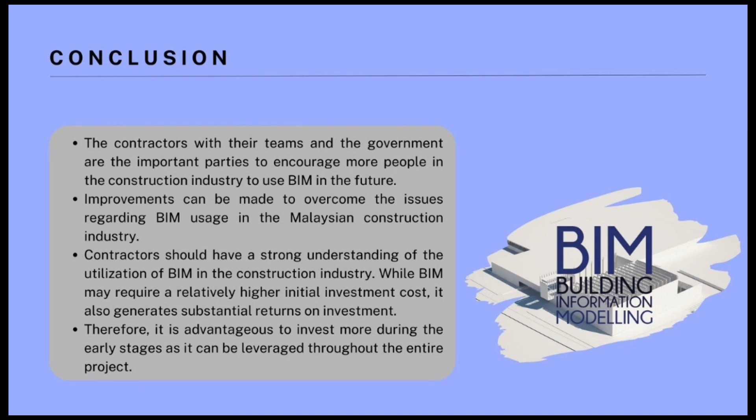The next section in data analysis and findings is major challenges in BIM implementation. The result of the data from this research contradicted the results from previous research. The highest ranking major challenge in the literature review was high cost. However, in the analysis of this data, most respondents agreed that lack of awareness was the top challenge, represented by a mean score of 4.72. In conclusion, all contractors with their teams and the government are important parties in encouraging more people in the construction industry to use BIM in the future.